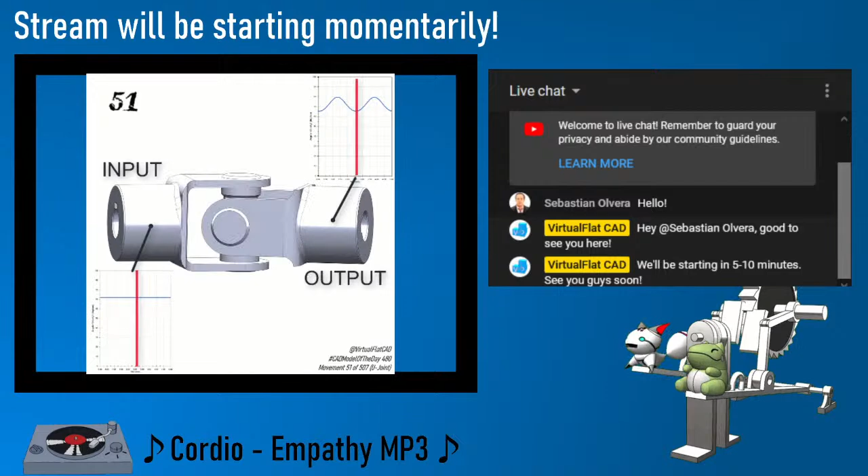Guys, it is so good to see you. I really can't express how happy I am to be back. It's been a bit of a mess back there, but don't worry about that. I gotta be honest, usually I get butterflies before starting something like this, but this time I just have pure excitement. I'm so happy to be back.

I see people in the chat. VM, hola, welcome to the chat, Sebastian. Thanks for dropping by. Honestly, the fact that I was kind of offline for a while, and having people come back really means so much to me. That's amazing.

Of course, I've been continuing with CAD Model of the Day. Let me put down the music a little bit. We're about to do number 481 today.

But yeah, I've been kind of yearning for this streaming, and it's just been this flurry of me starting a new job towards the end of last year, and then my house getting hit by Tropical Storm Eta, which flooded some of the property here. So it's starting to look normal again, and I'm feeling normal. It's so good to be back.

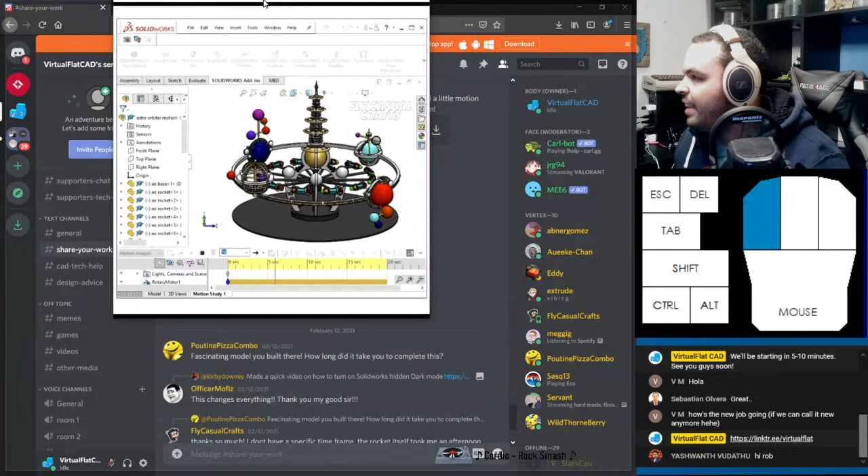That's really an amazing assembly. If you go into the Discord, give this guy some kudos, man, because this had to have taken hours. I love the level of detail and just - oh, I gotta play it again. Just so aesthetically pleasing, so awesome.

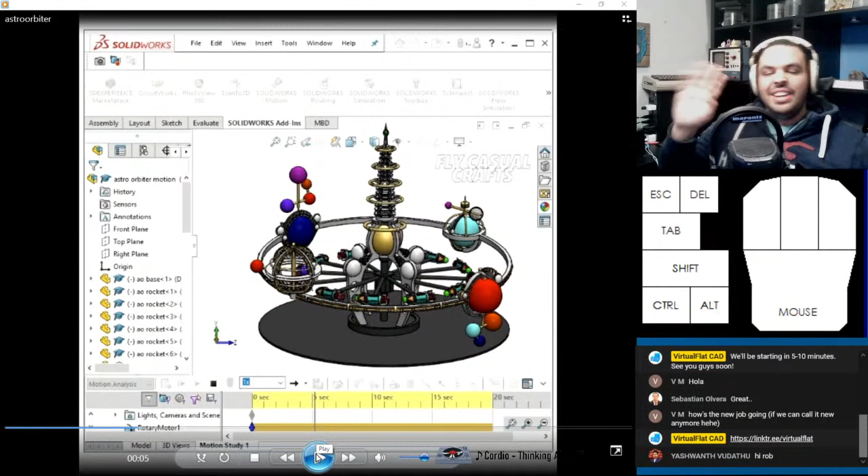And we got Yashwant in the chat, you know, longtime supporter, longtime friend. Good to see you, buddy. I'm glad you're here. We're just hanging out, checking some of the stuff in the Discord.

Actually, come to think of it, I know this is a little bit on the old side, 3 months too late, but I don't think I ever showed this - Yashwant, the very same in the chat right now, created this very smooth motion study with the chains to celebrate the new year. Additionally, Yashwant also has been doing daily CAD, just like I have, and he's been doing a great job. I follow him on Instagram, you can see his handle right here.

Yeah, go check him out. He does amazing work. Got GM Trombone in the chat. I know this kid. Can you do Lucio's gun, please?

Overwatch 2, my friend. For those uninitiated, Lucio's a character from Overwatch, and he's just got a cool kit. Let's see if we can get a picture of this dude. So what GM Trombone wants me to do is his gun, which I think looks pretty cool, but that's gonna take a little while, maybe a couple hours. I think that'd be a good one to just do on stream, start early, chill and listen to some beats while getting that done. That'll be down the pipeline.

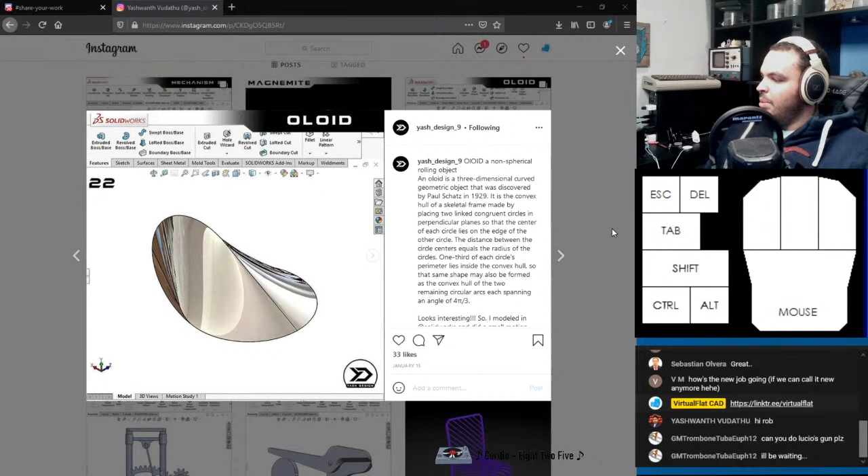Let's see, yeah, I'll be waiting, he says. Yep, don't worry, I don't think you'll be waiting long. But well, I guess I'm going to do mechanisms all this month, so at least it's going to be a month. Kind of a lie, but yeah.

A lot of these I definitely want to get to. I've done this one before. Oh, I didn't see this one actually, yeah, the exploded view of the assembly. Pretty awesome. What else? Oh yeah, there's another guy here.

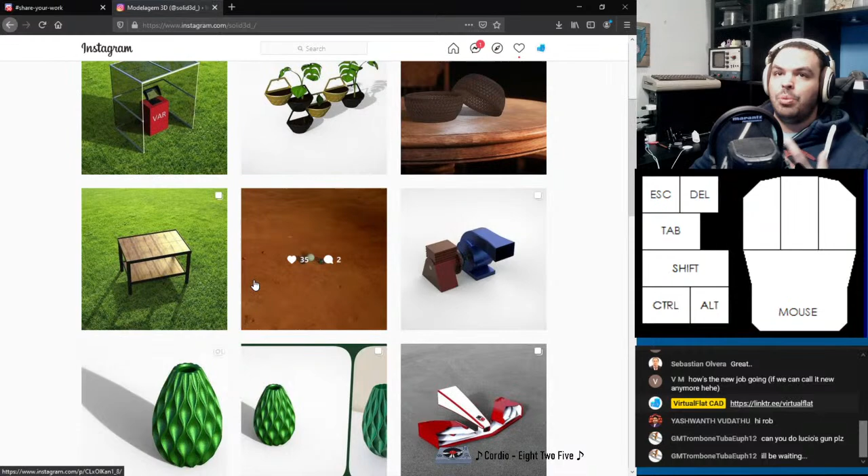He's also on my Discord, so if you see this guy, believe this gentleman, solid 3D underscore. He's in my Discord, and he's also doing daily CAD too. I'm really glad that my project really rubbed off on people, and they're just taking it to improve themselves and have fun with it at the same time.

And good old Dragon Radar, this one is wow. I think that's Portuguese, I can't understand the caption, but this is really amazing stuff here. A good old Lombardi trophy, that one's a fun one to do.

Yeah, good old Thor's hammer. I remember the video where I basically exploited a bug in SolidWorks to give this thing infinite mass. Good times, I really just gotta get back into it.

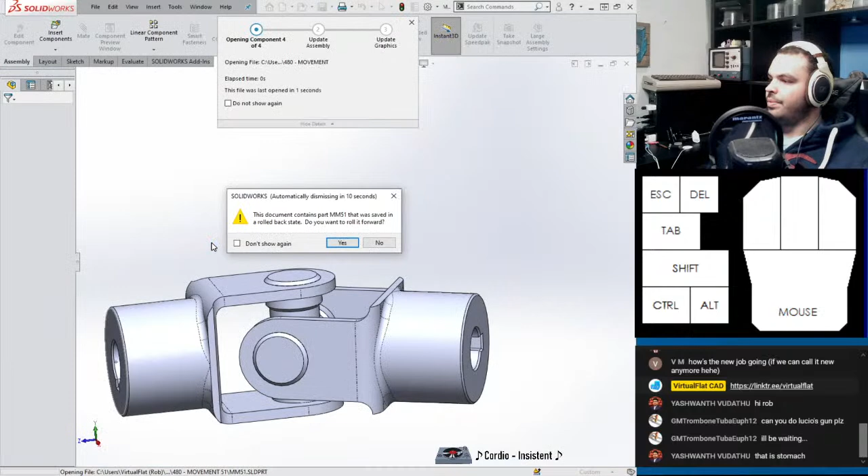But let's say you only want one joint and you wanted to solve this issue. How would you do that? So let's get into SolidWorks here. Let's go ahead and open the old one first - I'll probably build off the old one here. So, roll back state - do you want to roll it forward? Sure, yeah, let's rebuild.

Alright, so I got a part that's angry at me for some reason - I'll look at that in a second. But you can see I just used regular mates to make this thing spin the way it should, so there's no motion study, solid body contact or anything like that. I did that on purpose because solid body contact is just not precise enough. Well, it is precise enough - you'd still see the ebbing and flowing.

But I don't know if you guys saw, I presented at 3D Experience World. Well, presented - I say that because it was all virtual this year. The format was a 30-minute pre-recorded video with a 10-minute basically live Q&A, and the recording of that is up.

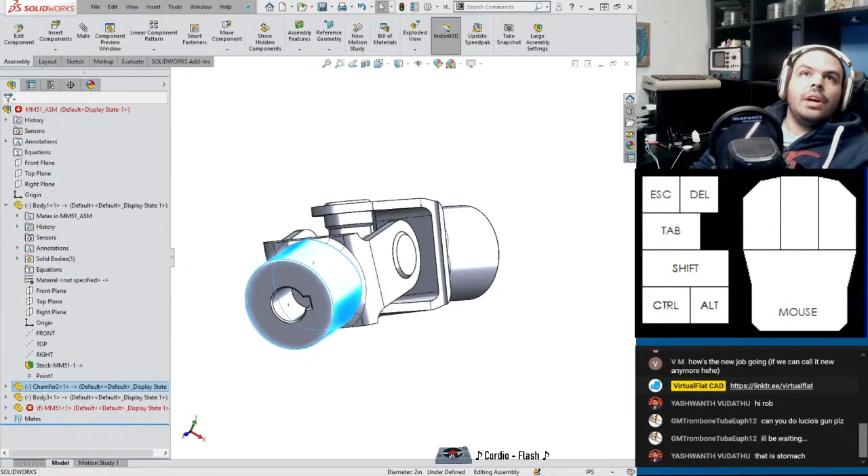I just loved how everyone reacted to it. During the whole thing, it wasn't done over Zoom, but with some other virtual technology. You could send an anonymous question to the presenter that no one else would see, but I kept getting flooded with comments like 'oh this is cool, I'll try this stuff out right now,' which I loved so much. So if you missed it, no biggies, because there's just too much good stuff going on in that place.

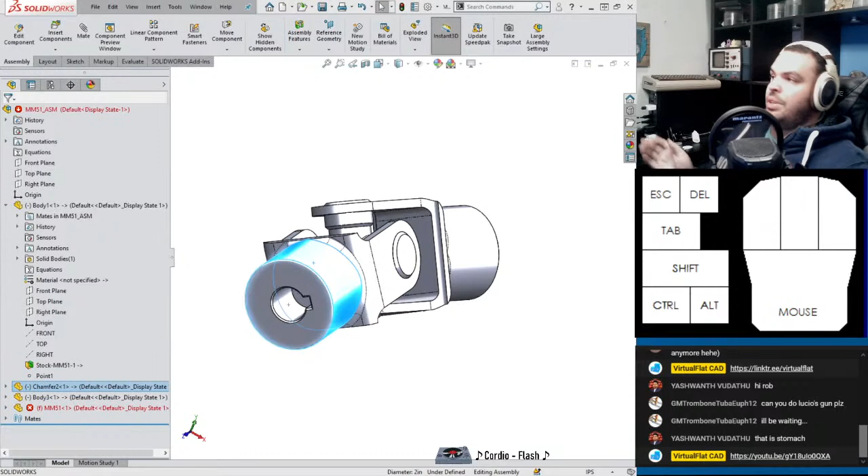But I have the VOD for you to enjoy. Basically what I was saying in that, since it was all about animation, was if you can accomplish your motion with just mates, that's usually the way to go. It's less computationally expensive, and you get more precise numbers out of it.

Yeah, we can even check out the motion study, what I did. I'm not doing any sort of weird tricks - I have a motor going at a constant speed, 12 RPM, driving this side, going clockwise as seen from the end here, though the direction doesn't particularly matter. So you can see it moves just like the way I was clicking and dragging it before.

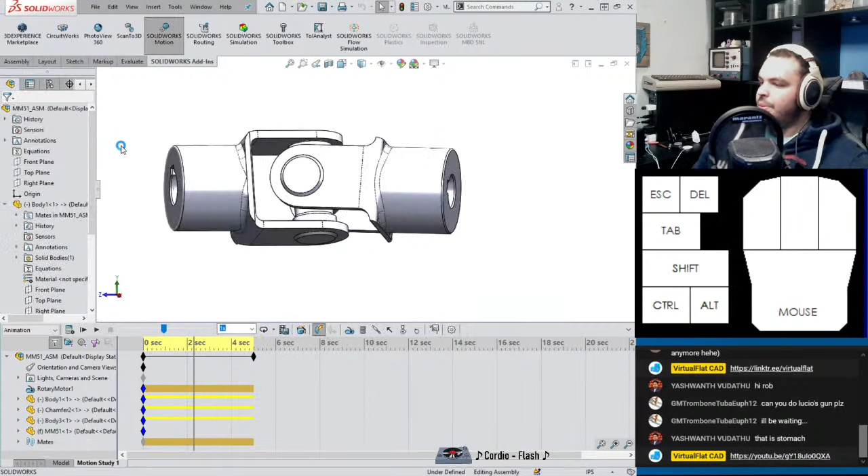The fun thing you can do is - I probably should turn on SolidWorks Motion before I proceed with this. There we go, set this to motion analysis, because you can't get those graphs with regular animation - you've got to tick it on to motion analysis. But you can actually specify these plots, which for some reason spawned on my other screen. So there's the input curve, and I suspect this one's also going to spawn on the other screen. Here we go - on the left is the input, and on the right is the output.

And actually, I did a couple of extra steps there to make the graphs the same, because there's something interesting I want you guys to notice. If I put this together, while the output is speeding up and slowing down, you can see its average speed basically looks exactly like a sine curve, and it is. The average of this sine curve is right where this one should be - at 72 degrees per second. This is a sine wave centered about 72 degrees per second, which makes sense, because if you're powering one side, you're going to get the same amount of displacement on the other side.

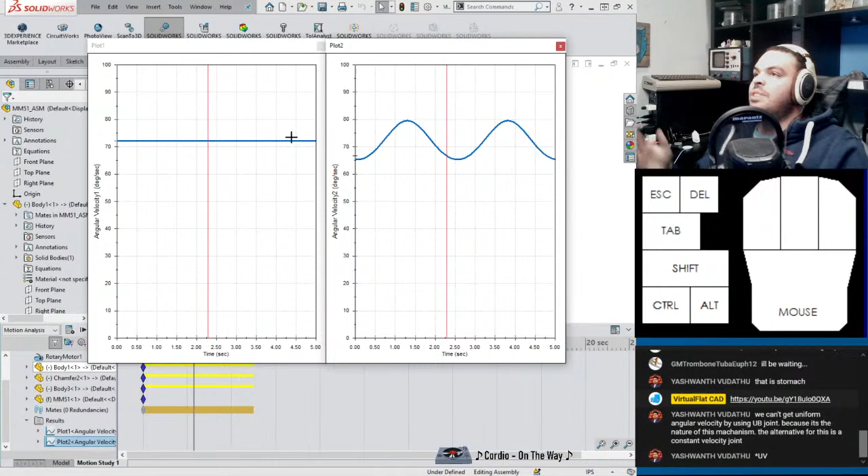But when that happens is varied, but it's just like, what goes in must come out, right? So we're not breaking the laws of physics here. So Yashwanth chiming in: we can't get uniform angular velocity by using a universal joint because it is the nature of this mechanism. Correct. The alternative is a constant velocity joint. Yep, hit the nail right on the head. Because we're doing a CV joint today. We're doing a constant velocity joint.

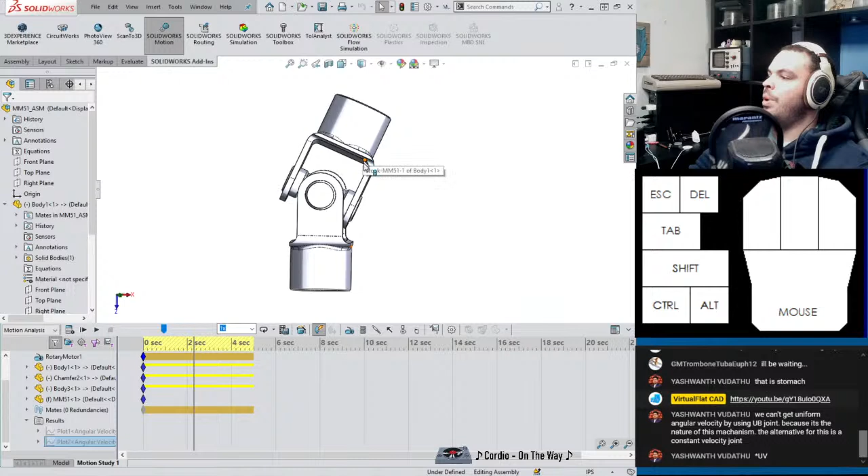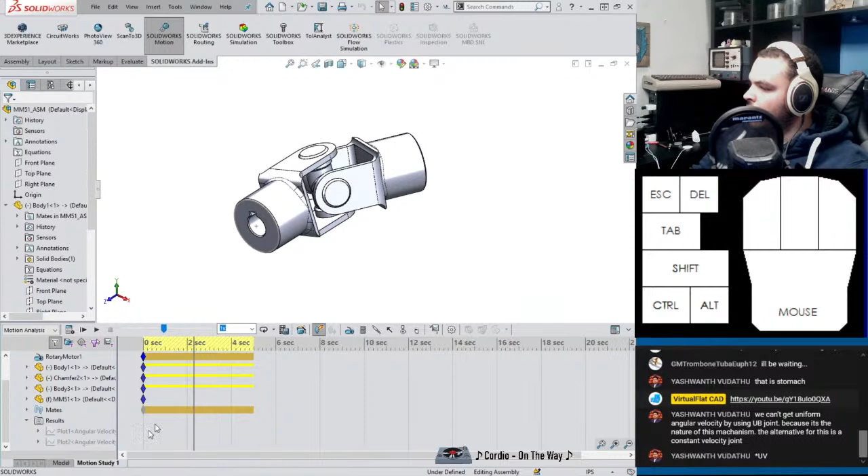So basically, I'll say one more thing before we start modeling a CV joint here. I guess a cool way to consider why this slows down and speeds up, I like to do it visually. So let me prep by setting up a plane here. Oh, got a little angry at me. Well, I guess it makes sense because those should be collinear. So let's say I want a plane just like that. Grab that, pull that out. Okay, looks good. Let's hit it with that save. Okay, let's get back into here. And actually, let me go back to model and make sure that planes are showing. So, yeah, there's that plane that I just created. So if I go ahead and edit, I can actually sketch right on this plane that I created. And I'm going to grab the circle here. So this circle is going to represent basically the path of a point that's right on the edge of one of the members here.

Hey Ray, what's going on? Good to see you here.

Just having fun with a universal joint here. But what I'll do is I'll convert this circle onto this plane. So as you can see from here, it looks like a circle, but you may notice that it didn't convert it into exactly a circle. What are these points here? Well, that's because SOLIDWORKS does this when you basically sketch an ellipse. And that makes perfect sense, right? Because a circle that projects onto an angled plane will look like an ellipse.

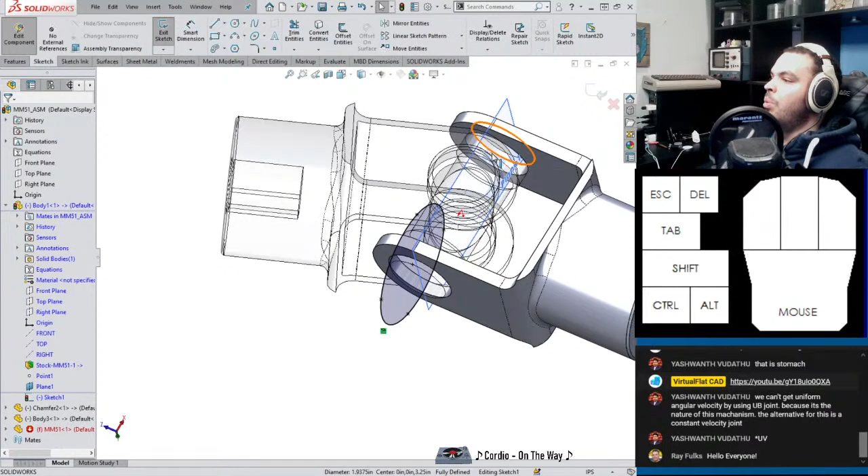And that is kind of the behavior where we see, well, if this is spinning at a constant rate, this part of the ellipse, being that it's angled, is basically less distance to the point of rotation. So the point's going to go on this side of the ellipse slower, but then when it gets to the midway point, it's got most of the ellipse left, so it speeds up to compensate. And that's kind of the way I like to think about it, in that visual sort of way.

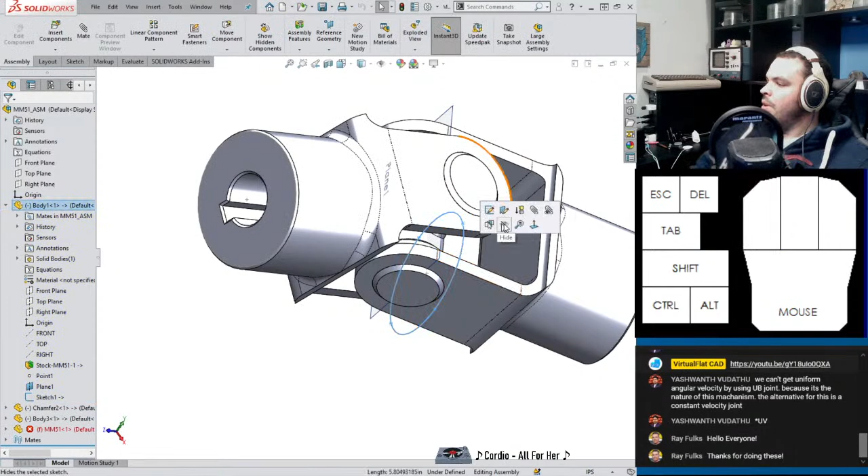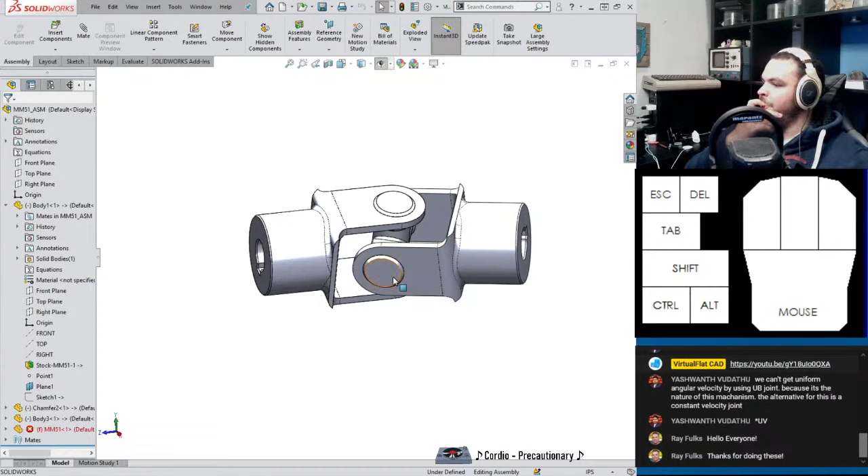So let's address the elephant in the room. Why is this errored? First thing I want to know. Oh, okay, because I think this delete bodies is consuming the bodies, and then it's trying to delete something that isn't there. Okay, so this can go away. Why are all my windows just spawning in the wrong place? Alright, so that is how that happened. So that's how I modeled it. I modeled all this stuff in one part and then did a save bodies command to put them in their own separate SOLIDWORKS part. I love doing mechanisms that way. It's just a quick way of getting them in place.

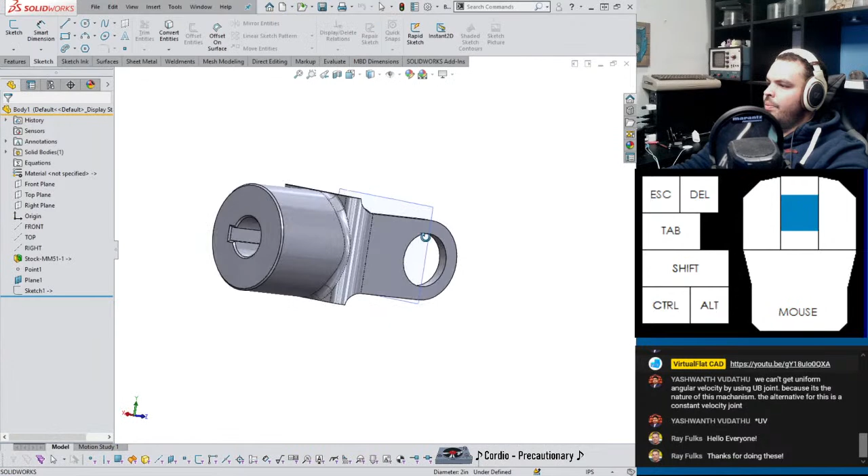Refreshing. All right, let's get into it. So I know I will need 2 of these, so I'm actually going to turn this. So let me open. I really should go and, you know, address this from the original SolidWorks part. But I'm in the mood for some, yeah, let's do some direct editing. Why not? This might be a simple exercise actually.

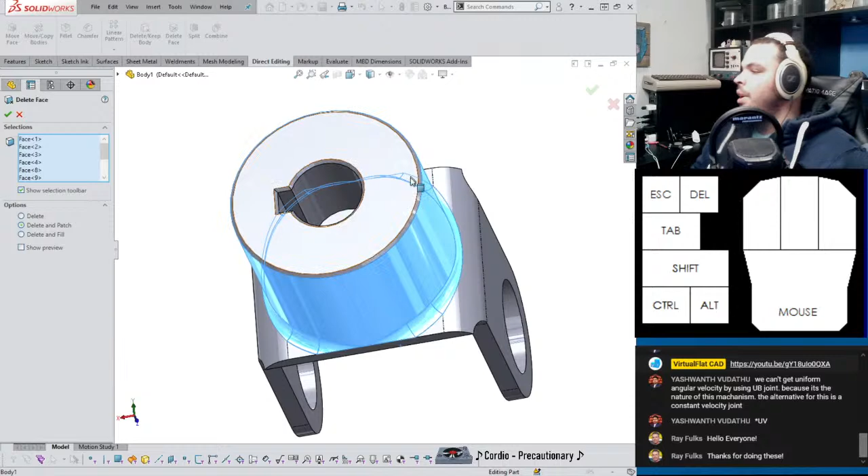So maybe my delete face can do this. So delete. We're gonna set it to delete and patch. Let's select all tangency and then just deselect these. So yeah, that's a little life hack there. So even if your bulk select tools don't get you exactly what you want, it's easier than picking all these tiny faces, right? So I think just over selecting by using that tool and just getting rid of the excess, it's a good way to do it.

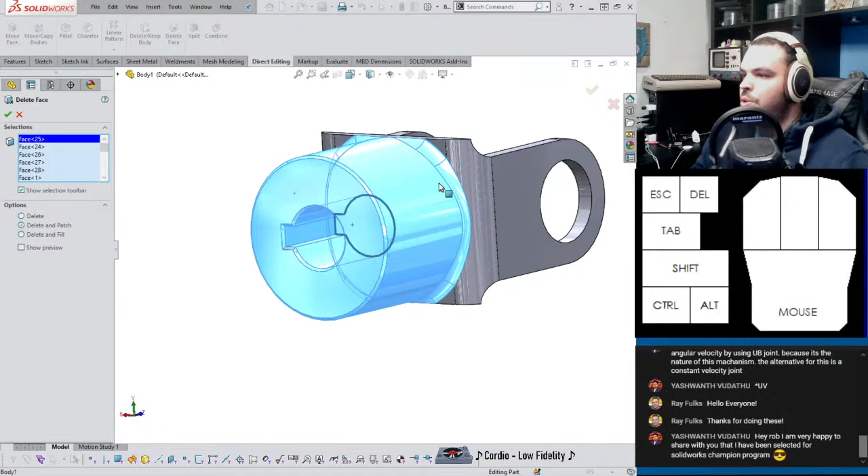Oh no, why'd you do that to me? For some reason, it kicked out my selection. No worries, because it did not take me very long. But it looks like I might just have to pick these dudes manually. It's alright. So now I selected all these faces here. So what I'm hoping delete and patch will do for us is basically there's a bit of a planar surface here. It should be enough to close up that gap.

Oh, Yashwanth saying, hey Rob, I'm very happy to share with you that I've been selected for the SolidWorks Champions program. Yes, that is amazing, dude. So for those of you who don't know, SolidWorks Champions program is basically we got a little club going on of the community people in the whole SolidWorks community. I was in there for a little while because I run the channel and stuff like that. But Yashwanth has been really killing it with especially his dailies and his dedication to getting certified. I remember when he was really hell-bent to get expert certified, and he did it. So, totally deserved, man. Welcome aboard.

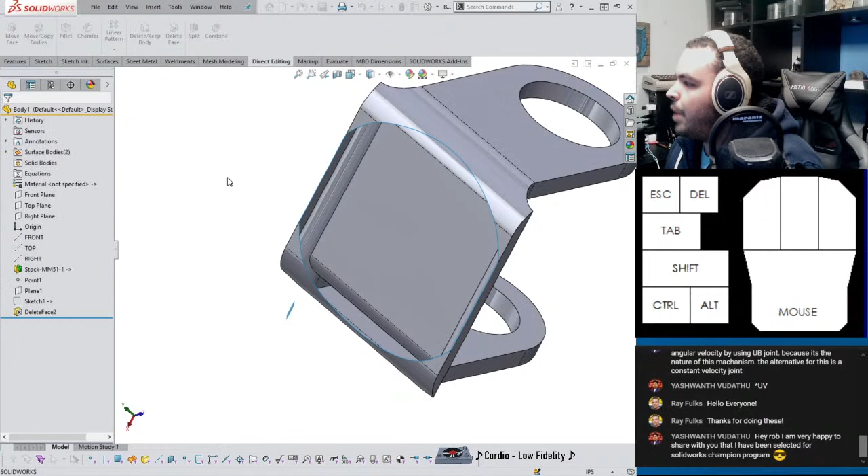No! Faces cannot be patched due to geometry condition. And let me spin this dude around. And let's see. Alright, well, if I hit delete, does it leave anything behind? Surface. Oh, yeah. So that's a cool trick, what I just did. So it was giving me an error. Couldn't patch due to geometry condition. Instead of delete and patch, just do delete. That is the mode of this tool that is just kind of the most accepting of weird circumstances. So I hit OK, and if it's one body left, that means it's something weird with it. You got to do it manually.

But I just forgot to click a face, so let me go back and zoom in, click it, set it back to delete and patch. See what that does. And there we go, like it never even happened. So, I love doing stuff like this. So in order to make that CV joint, I think I'm gonna pattern this one way or another. Well, this one actually has it facing the same way, like in the same plane. You see that? Well, we have analysis tools. If I put it on wrong, I can always fix it. So let's go ahead.

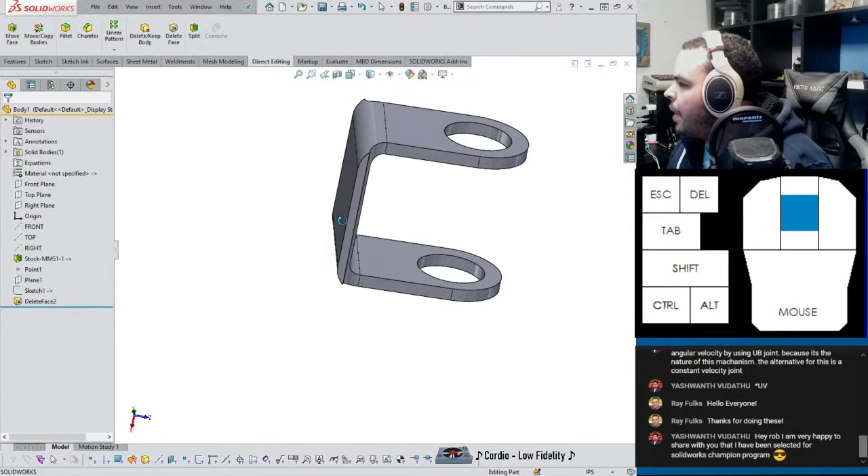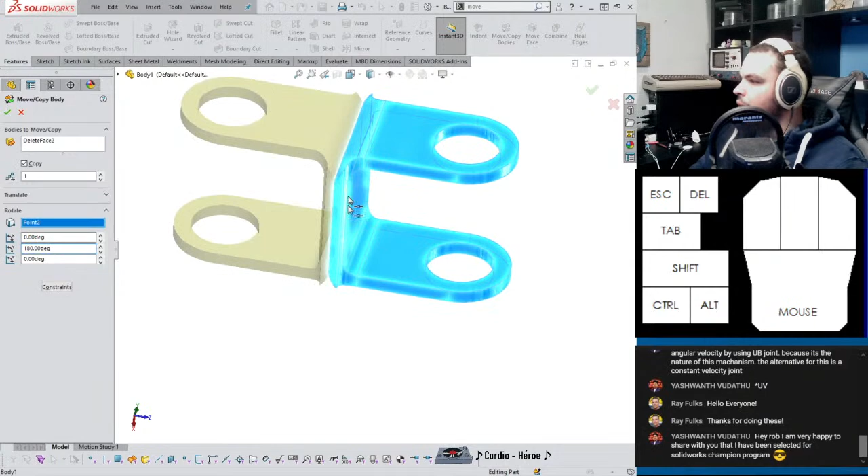Yeah, let's put a point right at the center here. So if I go to features, reference geometry point, and select any face, it'll actually bring out the centroid for you, which is pretty nice. And then what I can do, snap back in there. I'll just do move and just do copy, because I might have to rotate it. So I want to rotate about this point. The right hand rule states that I need to rotate about Y 180 degrees, and yeah, that looks pretty good.

And let's try and combine this. See what we get. Okay, and maybe look a little less weird here. Might have to. It's being not very agreeable. My edge select is not even working here, so let me try a face fillet. From here to here, please. There we go. Yeah, it's nice that fillet has so many different options to it. I don't know what I'd do without it.

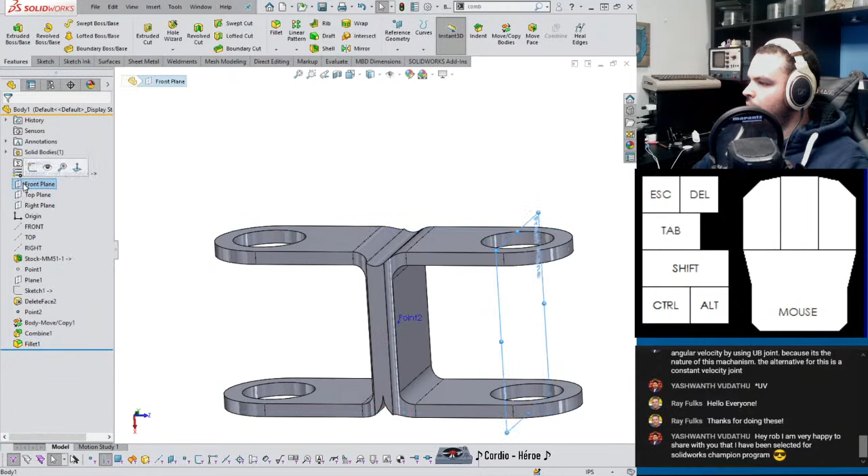And let me see if I can just get that to mirror. That would be nice. Features to mirror? No. Alright, well, I'm just going to have to do it the old-fashioned way. You do it again. Well, that wasn't so bad, and that seems to have created our joint.

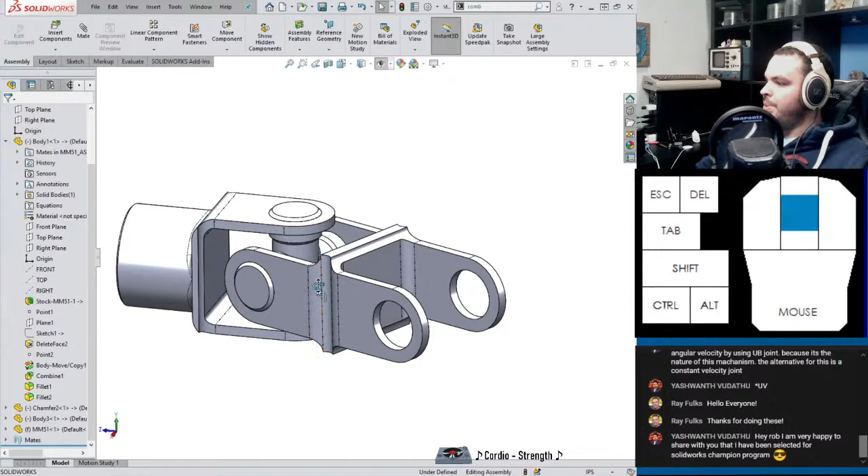Alright, so let's get a copy of this. So I'm holding down Control, click, and drag. We'll get you another instance of the component. And I'm just going to go for this edge to this, which I know is not the most robust way of modeling it, but it is like the one mate way of getting it not only rotationally constrained, but also in the axial direction as well, so it doesn't slide out. Okay, maybe I have to look at those mates. They're having a party here.

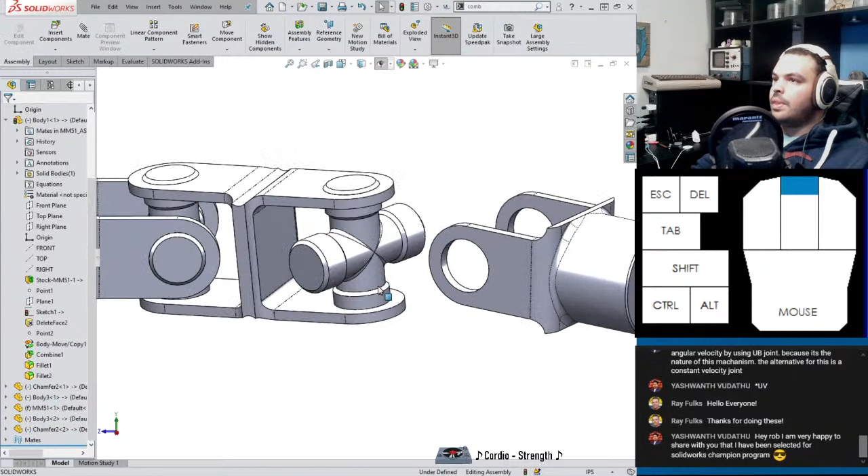And then I can, of course, just take this. And let's go ahead and just do the same thing. Why doesn't it want to be mated? Okay, we just got to go into mate tool. Let me do a save as actually. I'll give this a new directory. So we're on day 481, which is movement 51, I believe.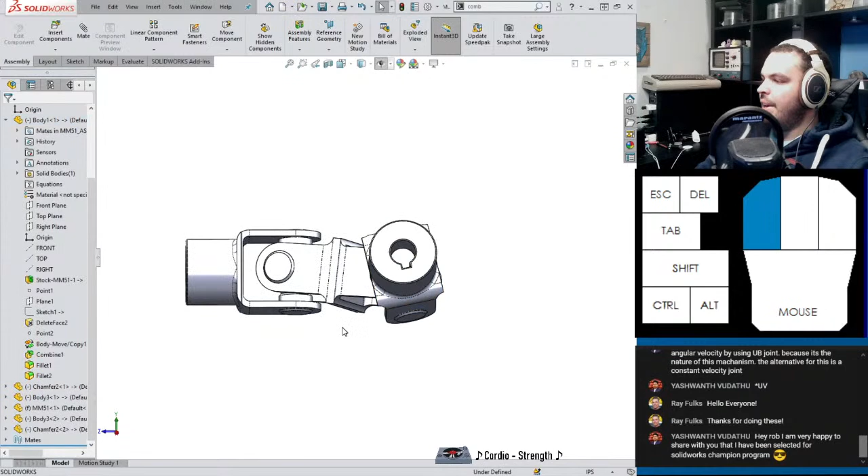Okay, yeah, I got just a bit of work to do in order to get this to not flop around so much. Alright, how do I want to do this? Let me show the top plane. Because I know I put a mate between a point, so I get that to show up too. Oh no, it's in here. Oh, but point 2 should be in the right place. Yeah. So this angle. Oh, that is so weird. You guys saw that, right?

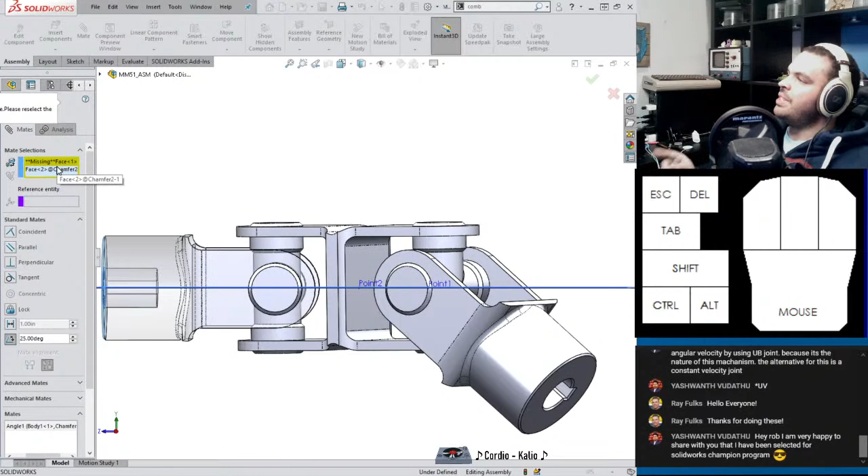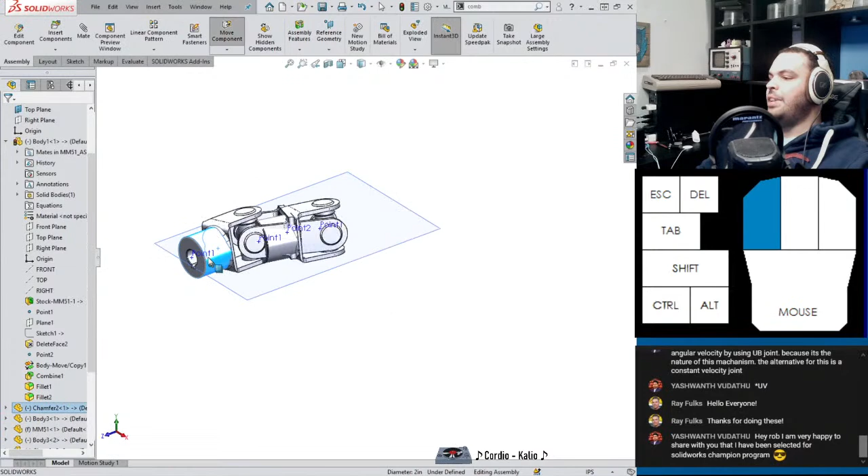I had a hunch. That mate was errored. It's missing a face. That makes perfect sense. But what's strange is that SolidWorks didn't let me know. Probably because it didn't rebuild, but let's get the angle of that squared away. And you know, I might just put another point. There's no point here. Let's get a centroid of that face. Alright, so there should be only one degree of freedom left.

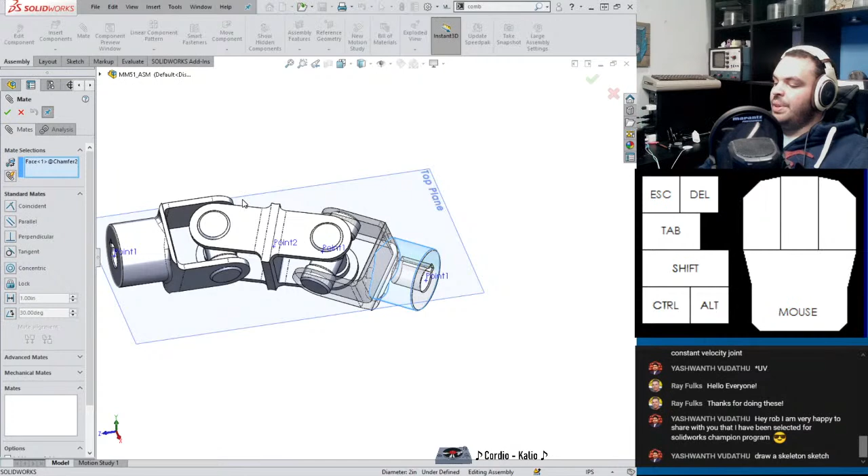So should I reference this or this? Let's do it from here to here, because then I could set the angles equal to each other. Draw a skeleton sketch, that's what Yashwanth is saying on the chat. Another great way of doing that. You do a sketch in the assembly level and you can mate to that. And it's actually kind of what I do when I model in a part. I'll convert a whole bunch of edges in order to mate to when I bring it back into the assembly. So in most cases I use that, but I think we're gonna be okay this way too.

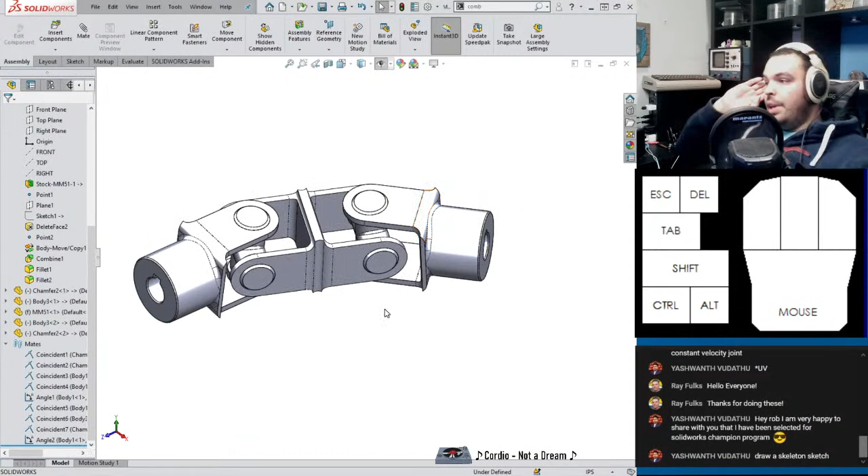No, we want an angle. Or I might do that if this gives me some problems. Let's see. I should be able to do this with that. Okay. So I'm just gonna give it this weird value, but then angle 2 should appear. Double click and say that this should equal this. 25. Rebuild. Alright, and now it should all be there. Check that out. Let me hide a bunch of the garbage. And let's throw this into a motion study.

Oh, it's showing me a window. Probably should just make a new one, honestly. New motion study, and I'll say constant rate motor 12 in that direction, set to motion analysis. Okay, so that's moving just the way we expected.

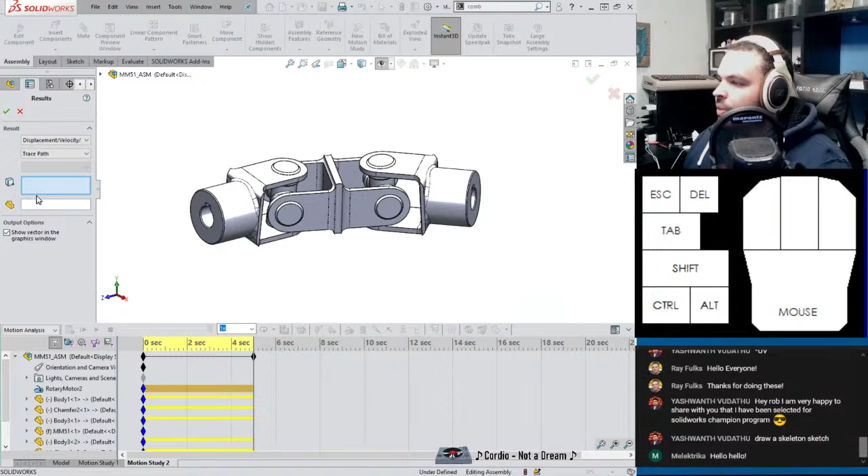No, we don't want trace path, although that is cool. We want to analyze the angular velocity. So just to make sure we're not going insane, just do select result component. Just do the magnitude. Yep, it's right at 72. Hooray.

Oh, by the way, Melektrika, I'll probably be playing a little bit of Genshin a little bit later in the stream once I get all this stuff done. So yeah, when I get done with this stuff, I figure instead of just closing the stream down, might as well have some fun and hang out with you guys a little bit more. I might play some games here. It's exciting because one of the games I play, they released a new character. Although it's kind of a luck-based system to see if you get that character, so we'll see how my luck is. So that'll be exciting.

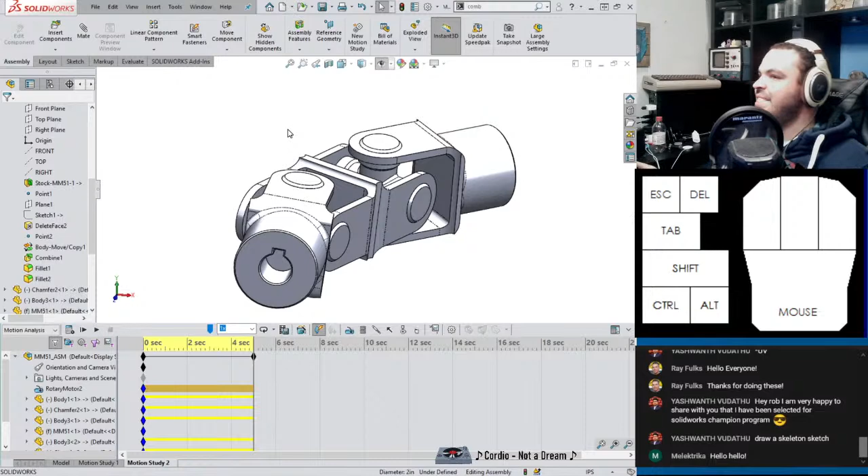Alright, so we got the one plot. Let's do that again. I might be able to just do the square face. What does this give us? Okay, so that gives you the sinusoidal velocity behavior. So moment of truth. What does the end do? So one more time. Velocity, angular, magnitude, circly face. Alright, that's fun. So why is this constant velocity joint not being constant velocity?

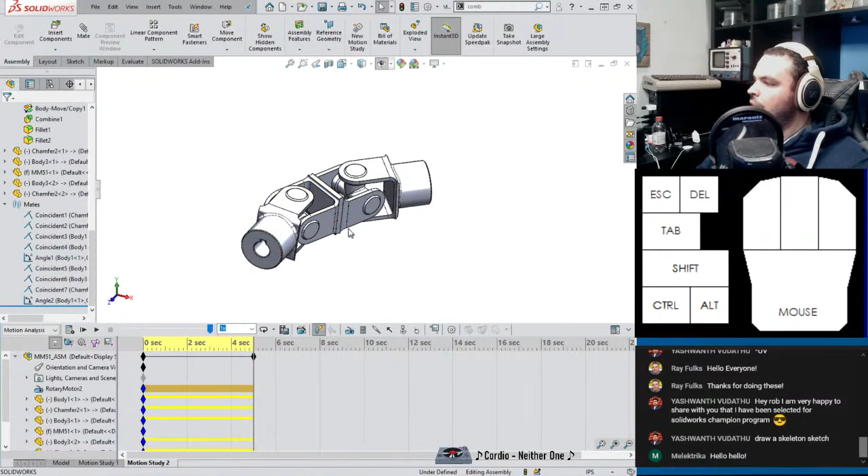Well, many reasons for that. One is the angle of transmission may not be the same, but I should have made them equal. So just to sanity check, we have 25 here, and 25 here, so that's checked. The next thing is that this is phased incorrectly. So what I'm gonna do is roll this back. And actually I might be able to do it in this feature. If I turn this 90 degrees about the z-axis, we'll make it look like that. So if we combine, that's fine. Fillet is probably going to fail. And this fillet's going to fail. Yeah, that's to be expected. So let me go back here and I can rerun.

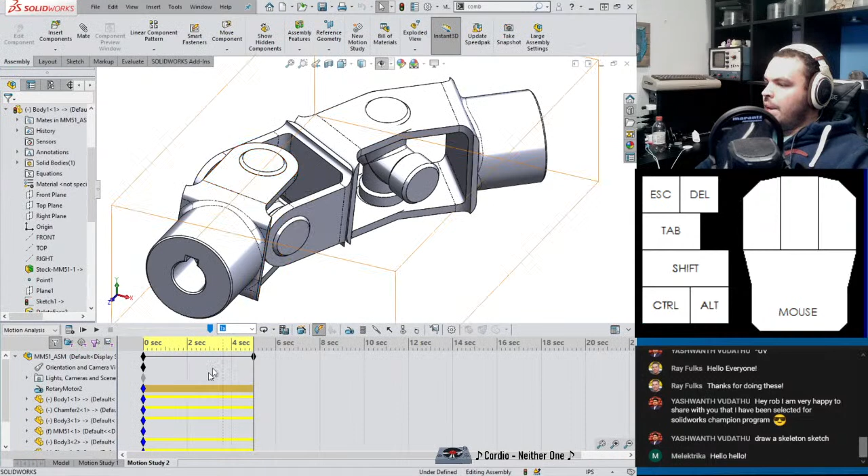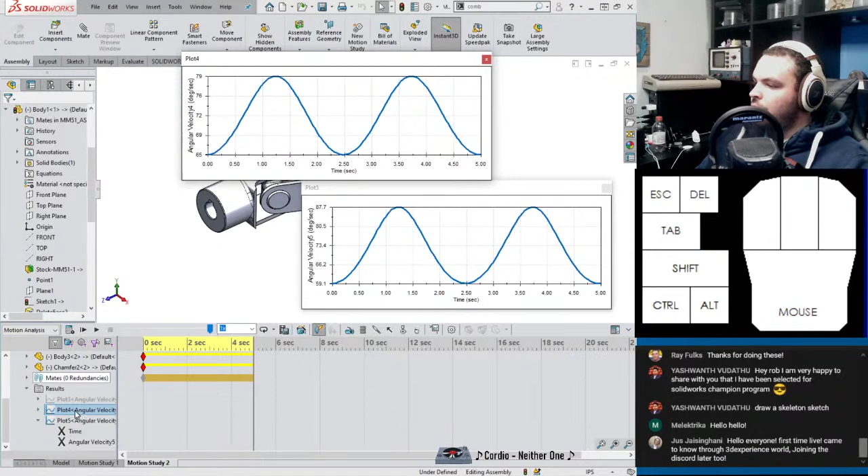Ooh, hello. Check for discontinuity in motion inputs. Wow, that's a new one. Oh, maybe it just had to rebuild. Alright, so now, what does this plot say? Okay, so that's really interesting. So these look exactly the same, but they're not. And that's why it's important to actually set what your graphs look like. So let's go to chart properties. Oh, not chart properties, I need axis properties. Scale. Just start at 0 and end at 100, and break it down into 10 and 5. So we have something like this. And let's adjust the axis properties for this one too.

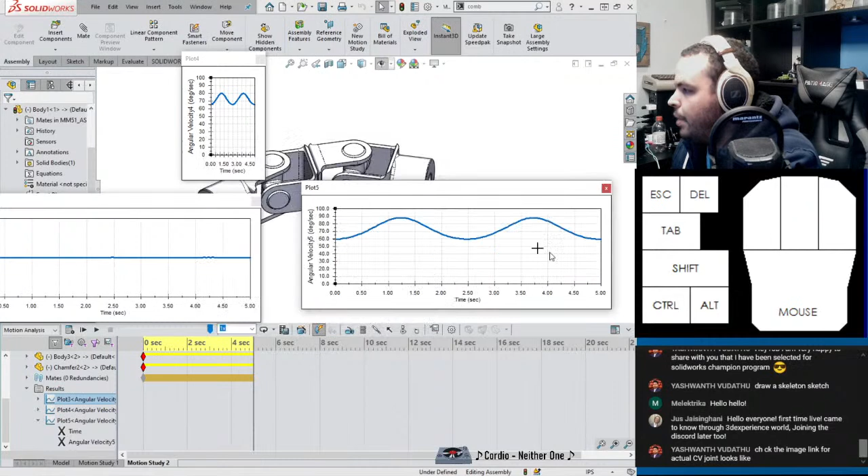Let's undo all of this. So from 0 to 100, 10, 5. So now these should be the same, except when you put them together. So you can see it's doing that sinusoidal behavior, but instead of the sinusoids canceling out, they're actually adding together, making the discrepancy much worse. But we're getting somewhere.

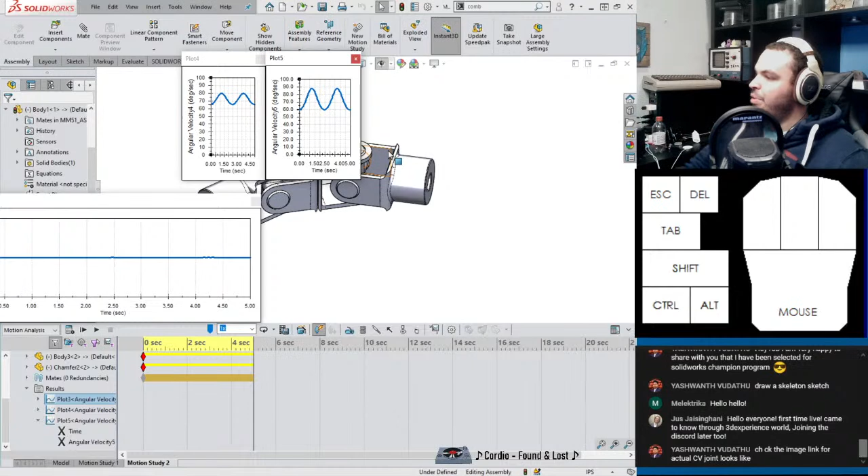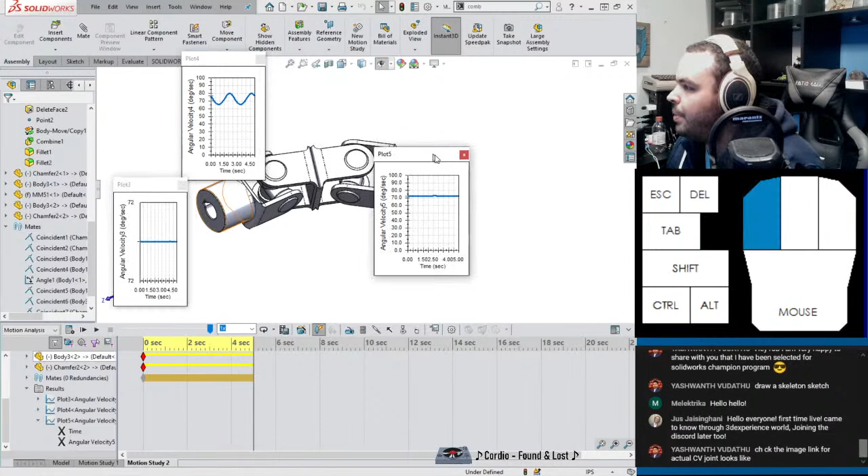So that's what's so nice about SolidWorks. Even though these fillets are failing, I can still just kind of play around with this. So what happens if I phase it? Well, actually, let me try something here. So this is silly, but let me run all of these again. Yep, there we go. I put it on backwards. So to reiterate, plot 3 is the input. Plot 4 is the velocity of the middle member of the CV joint. Plot 5 is the output, which you can see, other than there's a tiny blip there. I don't know if you can see that. Yeah, we phase them such that the velocities cancel out.

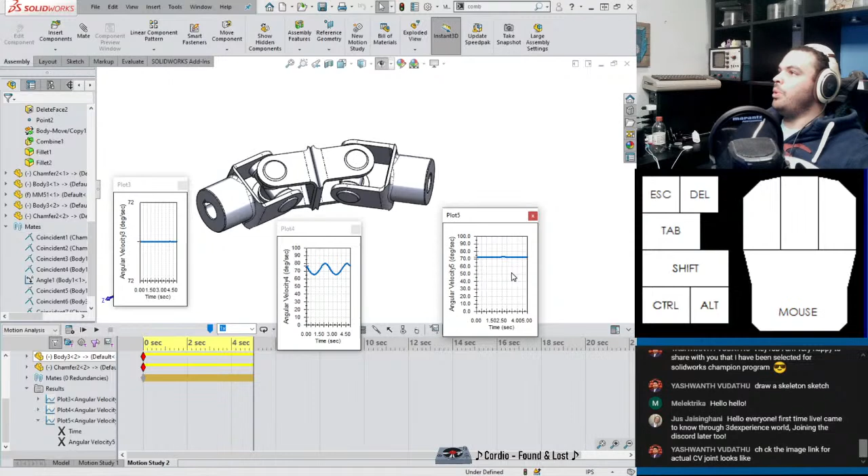So some of you might be wondering, what real world implications does this have? Well, anyone who's worked on their car and done drivetrain work knows, if you take out the drive shaft from your car before marking how it was put together, you're in a world of pain. The procedure is, if you need to remove your drive shaft for some reason, you need to take a marker or something and mark where along the bolt pattern your drive shaft is attached to your car. Because if you put it in backwards, you get these vibrations. So phasing is really, really important for these kinds of mechanisms. And anyone who's made that mistake before, should have showed them this, I guess. Should have had SolidWorks. But yeah, this is looking pretty good. So first I'm gonna focus on getting this saved out.

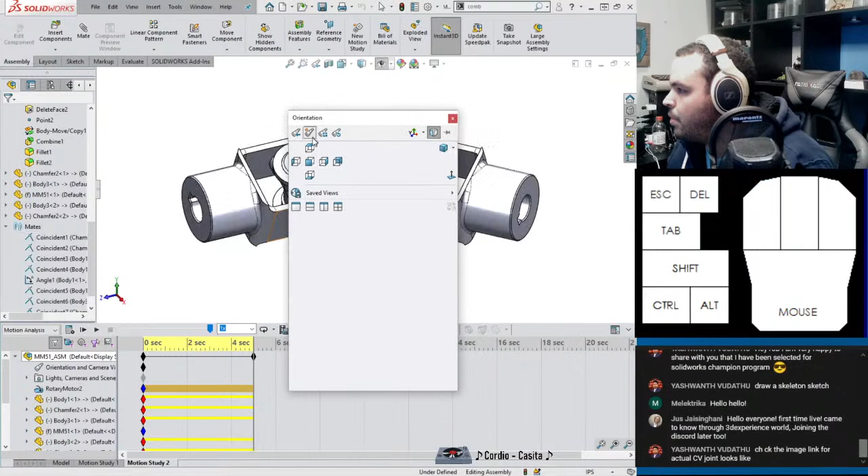So let me get this positioned in a way that looks cool. Maybe like that. And actually I also, oh shoot. Let me save this position, so new position. Man, these things are just popping up everywhere. Alright, so now, because when I move this it goes back, but because I have that saved position I can put it right back.

Excuse me. So I'll replace key, and actually replace key again, and let me fix the looks of this. So this fillet, I think it's stuttering a little bit. Let me save. Yeah, that's just long-time SolidWorks user. As soon as something starts acting up, it's best that you get your stuff saved up. For some reason, it's not letting me access this fillet, even though you can see from the display I'm clearly clicking on it.

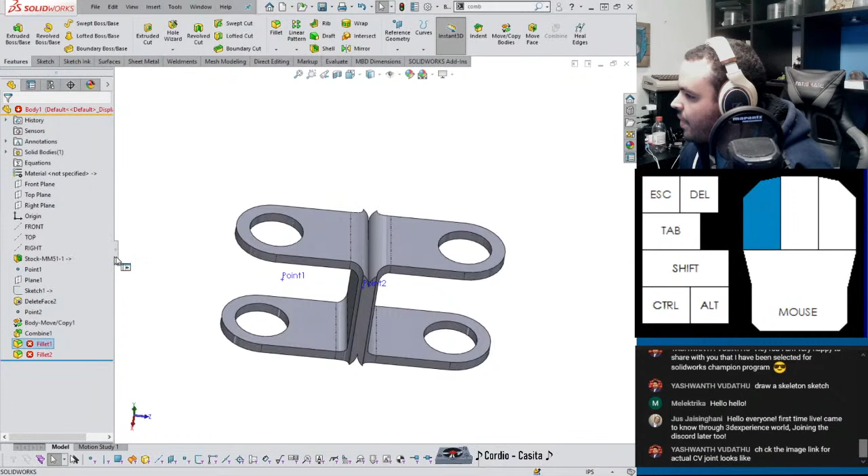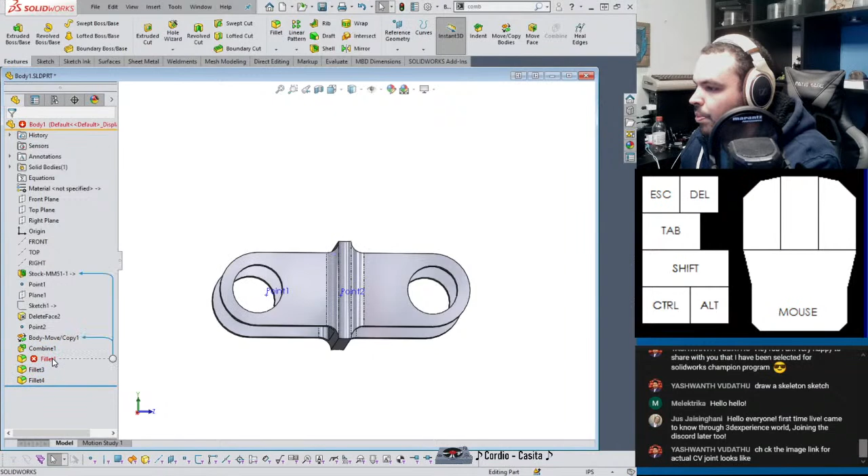Hello. Oh. That's weird. Well, doesn't this boggle the mind? What if I resize this window? Nope, they're invincible. All right, one last thing I'll try is I'll close and just open the dude back up. Nope. All right. Well, you leave me with no choice. I will put them back again. You know, sometimes you just gotta deal with these quirky things. Wow, why is this thing actually intangible? There we go.

Let's go back here to Motion Study 2 and make sure that this is set to 60 FPS because that's the way I like it. Rerun. Ooh, look how smooth that is. Well, it depends if on YouTube you have your stuff set to 60 FPS. So let's go ahead. Make sure this is 60. Set to MP4. Square. Okay, that looks pretty good. All right, and we'll let that churn. And I'll take a good look here.

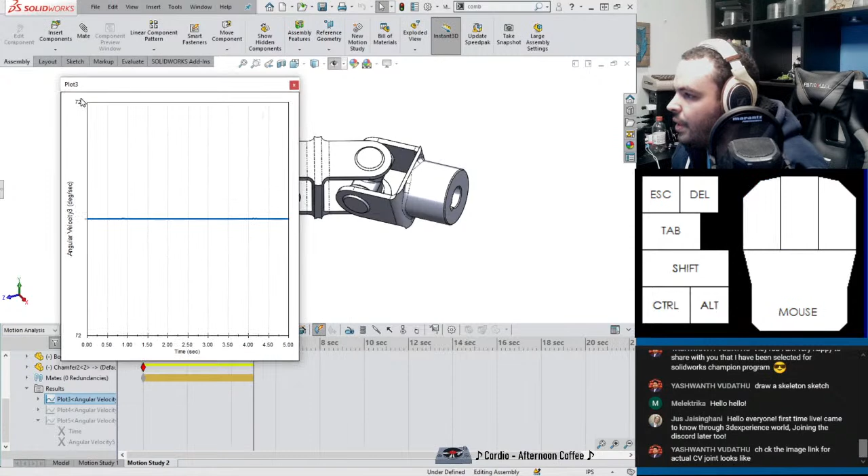All right, so we have these, but now I need to show plot. It's so tiny. And let me adjust the axis. There we go. So start at 0 and at 100, 10, 5. Alright, and I want all the plots to be the same size, so they at least look consistent when, yeah, I'm probably just gonna take a screenshot of them. It's whatever works, right?

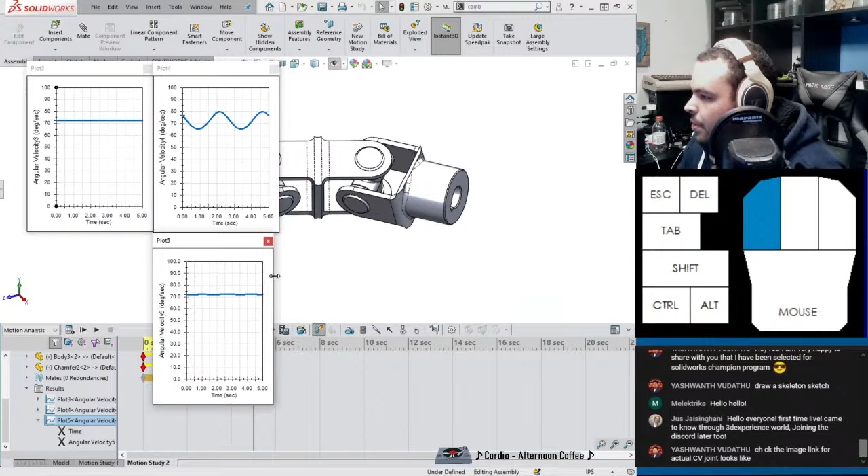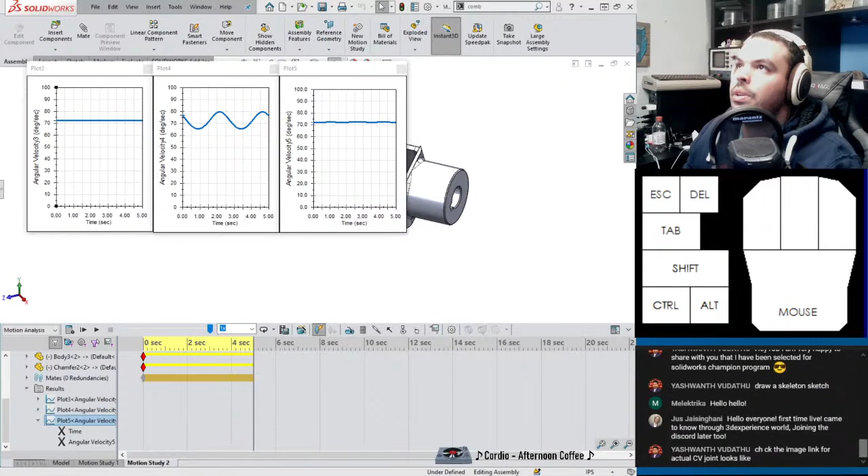Show. Okay. And the perfectionist in me is like, make their widths the same too. And I'll just pull this out just a little bit. Okay, let's grab the snipping tool and just do that. Yeah, we're just straight vibing. Nice to have some paint.net skills. So this is the input. That's fine.

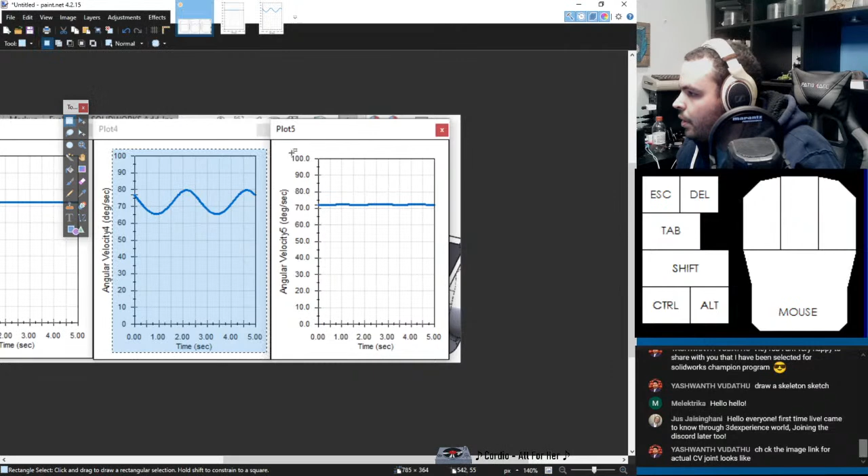This is the middle. I should look up if there's actually a way of exporting these as an image. I know there's a way to export them as a CSV file, which you could do all sorts of fun stuff with. Oh, I goofed that up, didn't I? Because I want it the exact same size as this. There we go. But yeah, I wonder if there's a way to actually export it so I don't have to manually do this. Okay, and this is the output. Okay.

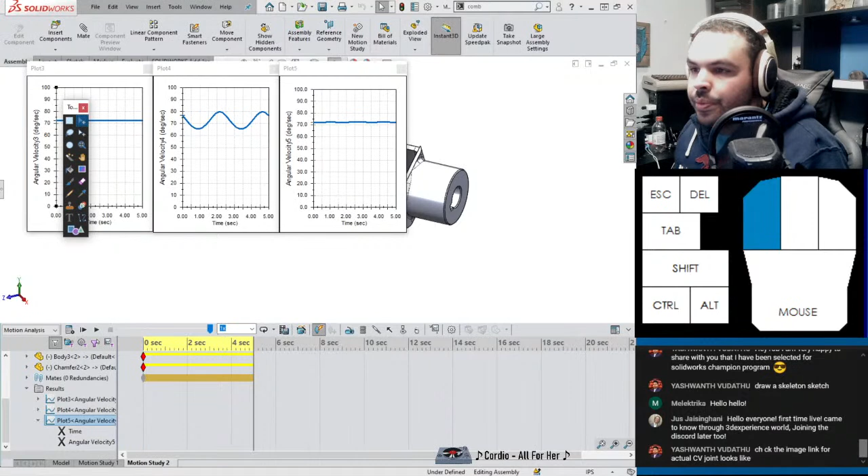Yeah, I think that's all we need from SOLIDWORKS right now, so time to edit it together. Do that with Camtasia. And I know people have sung praises of Premiere Pro, but I really like Camtasia as well. Oh God, the resolution. Oh my goodness. Yeah, so this is the old project, so I'm just gonna save a new one, you know?

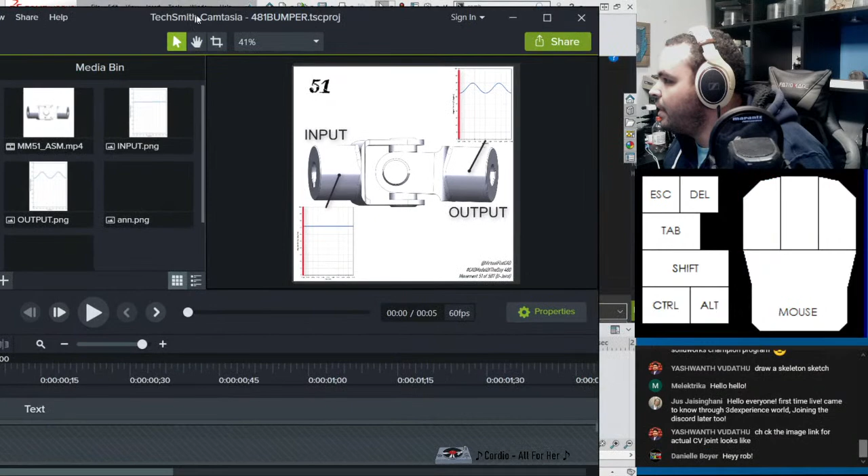Oh, it's Danielle. Hey Danielle, what's going on? Good to see you here. You know, look at this little doodad we made. Here, I'll play, check that out.

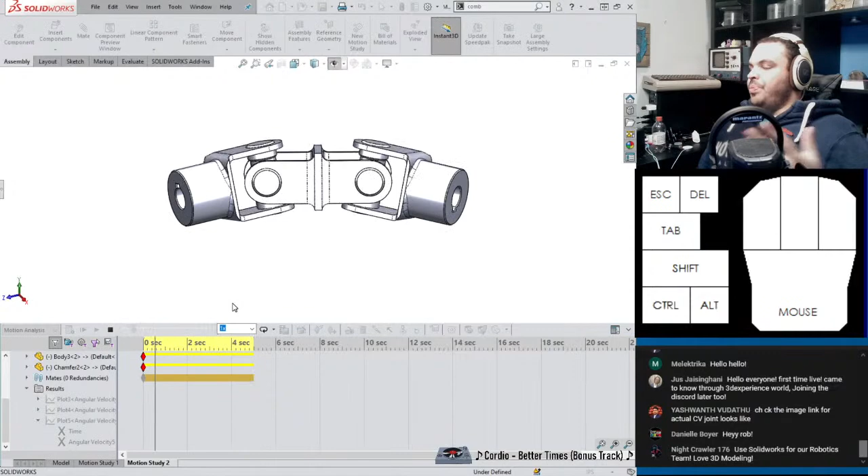Constant velocity joint. We got Nightcrawler176 in the chat saying they use SOLIDWORKS for their robotics team. Love it, awesome. So yeah, SOLIDWORKS is just like, you know, I've mentioned this before, but I'm actually a First Robotics alumnus.

My team was in South Florida, the Ninjaneers, Team 2383. And I think we had Inventor at that time, but there was not a strong emphasis on learning CAD when you're part of the engineering team. I wish it was really more of that. I remember seeing the CAD and just being like, that's interesting I guess, and just kind of shrugging my shoulders and going about my day.

But no, I really wish I'd started earlier. It's awesome that you're getting those skills right now, because it's crazy, like I don't think... it's just crazy to think how we did anything before CAD.

Oh yeah, we got Danielle, First alumnus there. She was alumnus of 2 teams, 4293, very nice, very nice. Aren't the team names or the team numbers given in order of registration?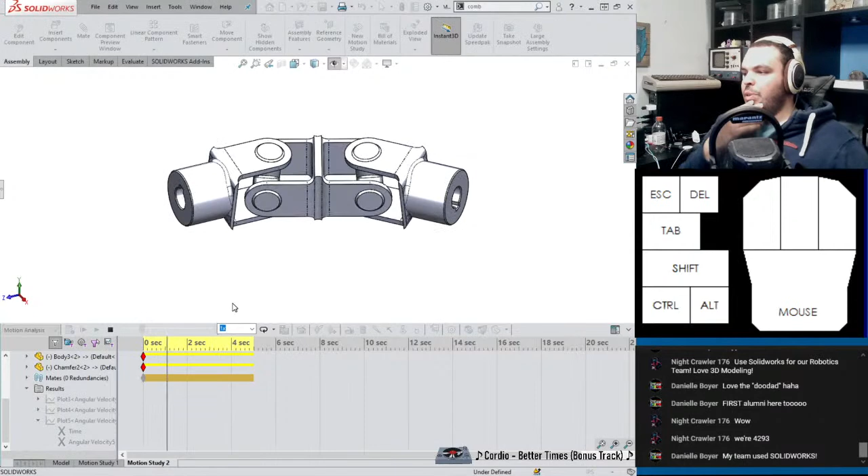Yeah, because I remember like when, this is a long time ago man, but back when I was on there, I remember there was a team that was number 180, and they were one of the first teams to exist. Man, good times. Oh, I guess I'll show you another doodad.

I'll take a brief break before I goof off a little bit. So I'm really excited because my life has been opening up.

Like I mentioned earlier in the stream, I got a new job towards the end of last year. And also towards the end of the year, around Thanksgiving, my grandfather passed away, and that was really tough for me too. So it's been a thing with rebounding there, and then Tropical Storm Eta hitting, and it's not the wind speed, it's just the flooding. It actually ruined some of our property.

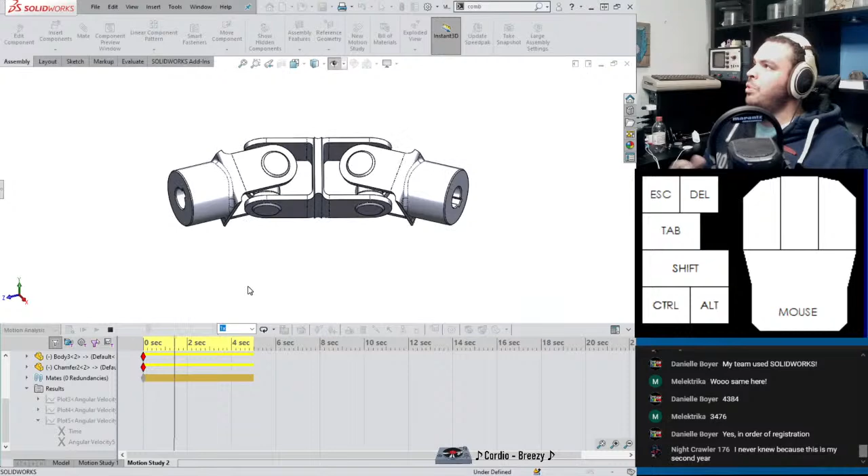So it's just like getting back on track after having all that hit me at once, it took me a while. But if any of you are going through that, it gets better. You just gotta hold on.

Yeah, Nightcrawler, never knew, because this is my second year. Yeah, honestly, another thing I wish I did, I was only on robotics just for one year. My last year I was a senior, wish I did it earlier. And actually, it's why I like to support Danielle's endeavors a lot.

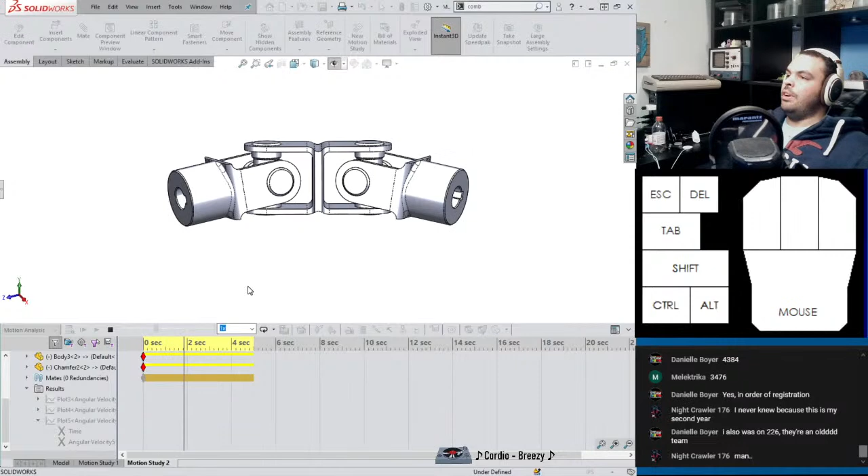It's funny, I actually tried to join my robotics team when I was in 7th grade. And for all intents and purposes I did, but it's just like a bunch of older high school kids putting this robot together, and they're just kind of saying like, wait, you don't know how to wire this up? What are you, some kind of Nimrod or something? It's just like they made me feel very useless. So having that open mentality just means so much.

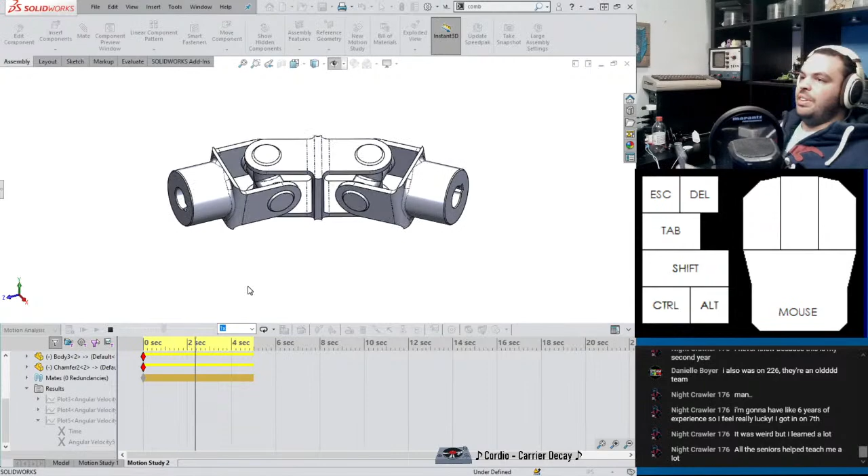Yeah, Nightcrawler saying all the seniors helped teach her a lot. Yeah, that's so good, I wish I had the seniors that you had when I was younger. Yeah, we keep moving on though.

That's right, Danielle. Oh, also I got something awesome to show you guys. So, one of my favorite... I wasn't much of a tank guy before, like military vehicles, but there's this one design that I really love because it's just so crazy.

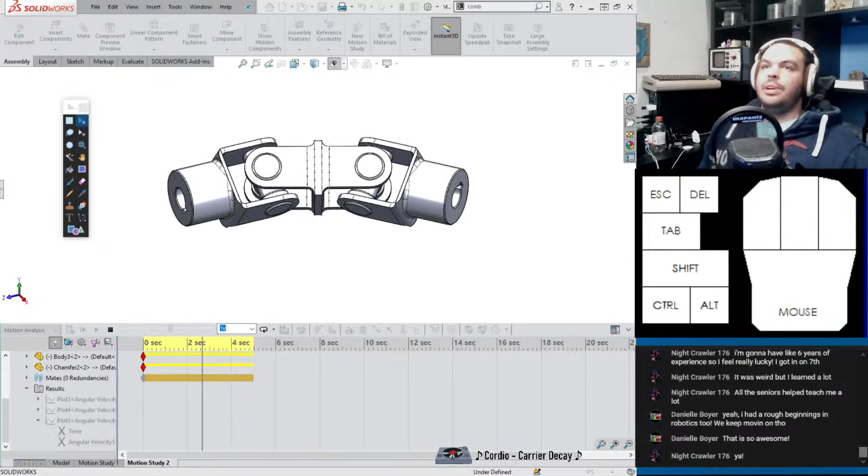Let me see if I can find it on my Instagram, because I did this way long ago. I think I did this on day 66, and need I remind you, we're on day 481, so it's gonna be a little bit of scrolling here. Let's see, we're in the 180s, so we're getting there. Really, we gotta see how fast Instagram can load.

All right, we're on day 79. All right, so I passed it. All right, let's get this boy over here.

Oh yeah, these are some of my oldest stuff, man. But this thing is just so crazy, it's like a motorcycle tank. I saw this in a TV show and fell in love with it as soon as I saw it. I've just been obsessed with it. And I found out there's a Lego set of it.

Well, sort of, and it's not made by Lego officially. It's made by another company called Cobi, C-O-B-I. But I wanted this set, this knockoff Lego set. They're exceedingly rare. I found one online, and I didn't even have a choice between used, it was just new in box, just one. Came all the way from Poland. I bought this thing in October of 2020, so think about when I last streamed, it's around that time, and it came like 2 days ago.

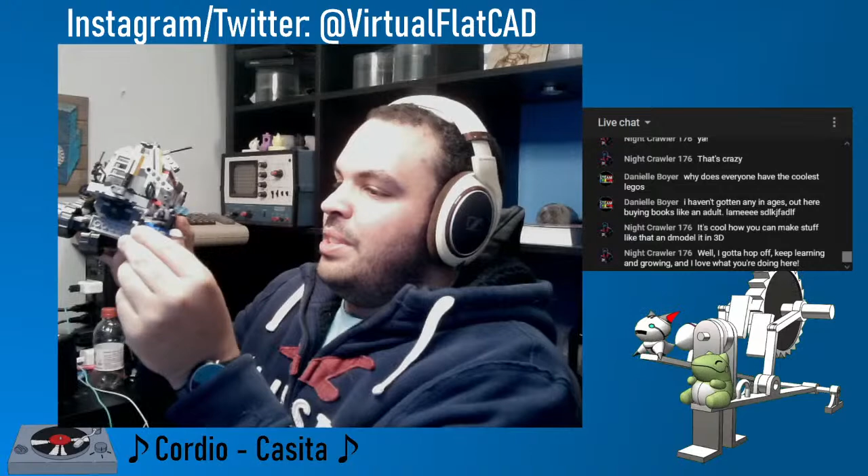Wait, why am I showing this on my small webcam? My brain is like small. There you go, look at him, he's just happy to be here. Very blurry, oh my god. Look at him. And he goes on this little hook, and it's literally, don't talk to me or my son again. I'll put him right here. Put him right there. Oops, that was my MagSafe charger. That we got by accident.

All right, Nightcrawler, thanks for stopping by. It's good hearing about you, and yeah, I hope to see you soon. Take it easy. Yeah Danielle, I'll get you a Lego set, we'll get you a Lego set. This is important, this is paramount.

I'm just gonna watch this again because I really enjoyed the editing I did for this. Like, I just ripped that bottle straight out of the screen. Oh my god, January of 2020, that was a year and 2 months ago.

Well, it's just like, when you do something like this, I don't do it for clout or anything like that. Although I'm certainly happy to have gotten a following of more than 40,000 people on Instagram, which is still nuts. I still haven't wrapped my head around that, but I didn't see that kind of following until like day 150, I would say. If you do stuff like this, you do it because you love it.

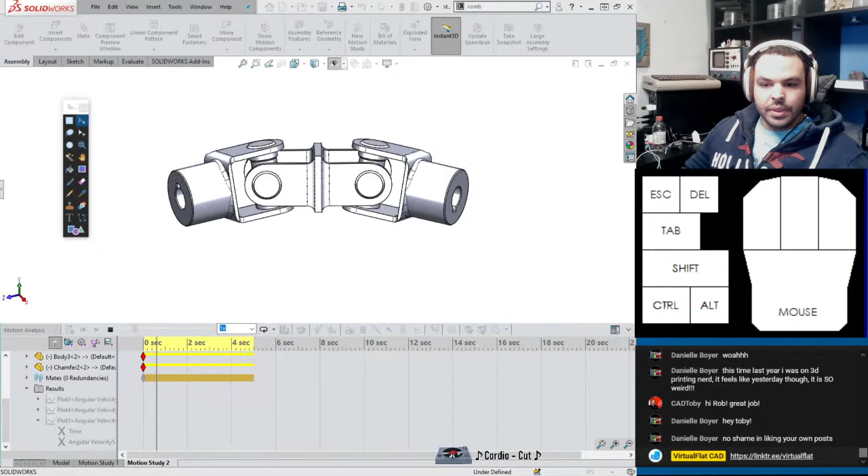Let's see. Let's see if the Discord's popping off. Yeah, I was looking through this share-your-work channel.

I'll actually show Fly Casual Crafts' masterpiece. I'd say he did an awesome job - I showed it in the first couple minutes when people were just settling in. But this guy, Fly Casual Crafts, created this amazing Astro Orbiter thing. This is an amazing assembly.

Let's show it open - yes, please. Show the animation. He animated this whole thing too, which is absolutely ridiculous. Yeah, it's just really amazing.

Like the little hat - whenever you see a little hat, that means education edition. So presumably a student, and that's really amazing dedication.

Yeah, let me do my little reactions. Also what I really enjoy is putting the little reactions on stuff. So I'll put 'add reaction' - I'll put a little surprised face on this.

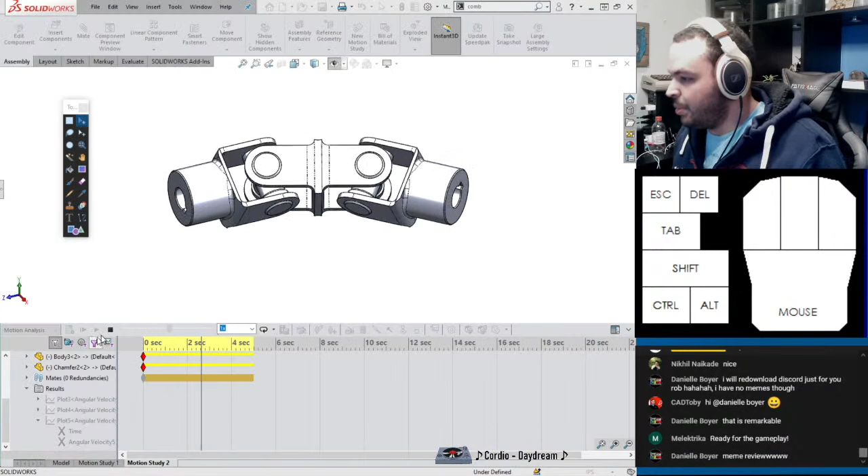All right, I think I'm gonna relax a little bit. First, let me do some resource management. Whatever, it's fine. Let's close all of these, get my memory back.

And let's play some Genshin Impact because there's a new character I'm excited about. Let's find it. Okay, I'm gonna watch my stream because I was testing this before and my frame rate tanks. Yep, there it is, it's tanking. No, help.

Alright, let's try it this way. And then launch. Alright, now resolution's being screwy. Yeah, I might have to restart OBS in order to get this to work - that's the only way I was able to solve this before. So let me get into the game and then I'll restart OBS, and I'll probably be back in a sec.